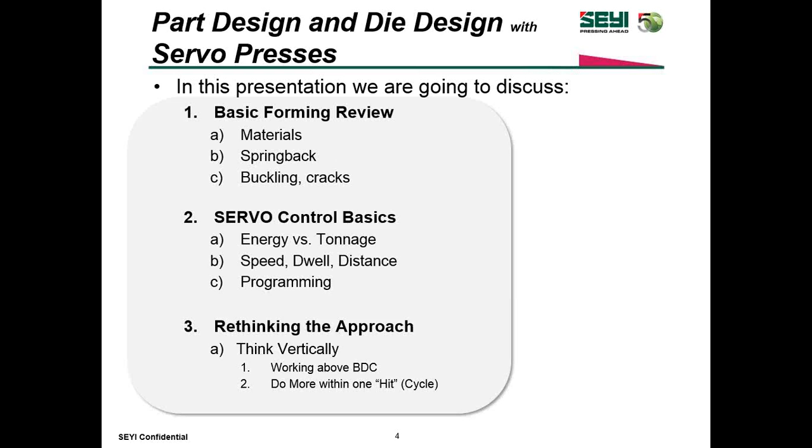As a part designer, you're always looking for cost-effective weight savings in the design process, mostly speaking from automotive experience, but it transfers to every industry. We're always looking at ways to design parts with less tolerance and closer fits. What I hear from customers, the tool and die makers, is that sometimes those part designs aren't very realistic. That falls back to the designer to foresee how gaps work, understand the material better, how it's going to form, stretch, and shape, trying to work with the part designer to come to a happy medium.

The third thing we should look at is that nowadays, with the servo press, the conventional way of thinking was that you design a part, design a die, and that determines what kind of press you buy or need and its specifications. Now with the servo press, it's turned everything around.

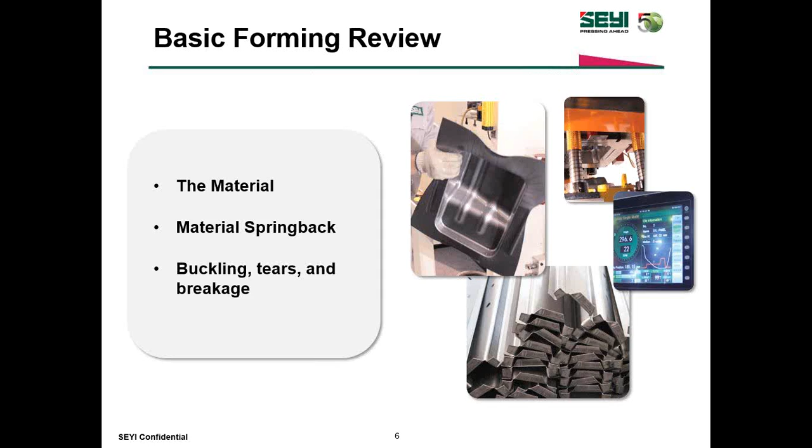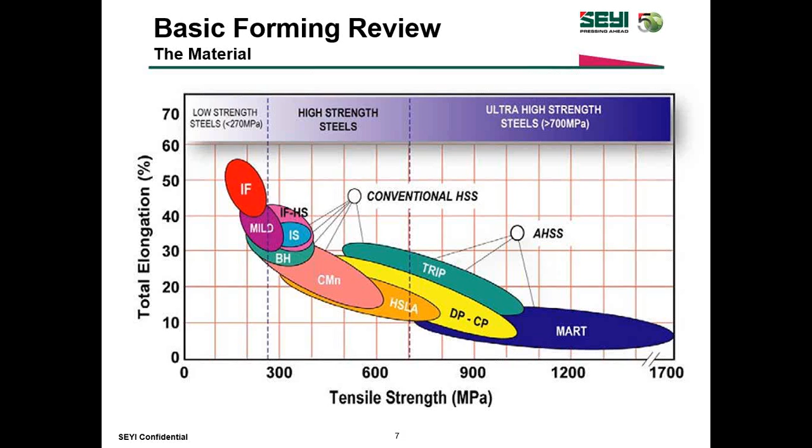Let's start off with some basic forming review, going through this quickly. Focusing on the automotive industry, we're certainly starting to see high-strength steel pretty much prevalent everywhere. We're even starting to get into higher strength steel, measured in megapascals, that are off the charts, getting into transformation induced plasticity and martensite, where these materials, especially with trip steel, actually harden as they're being formed and become a very complicated beast to grab hold of. What we're starting to see now is customers falling into these ranges of strength, yield, and tensile strength, getting into the 500 megapascal range.

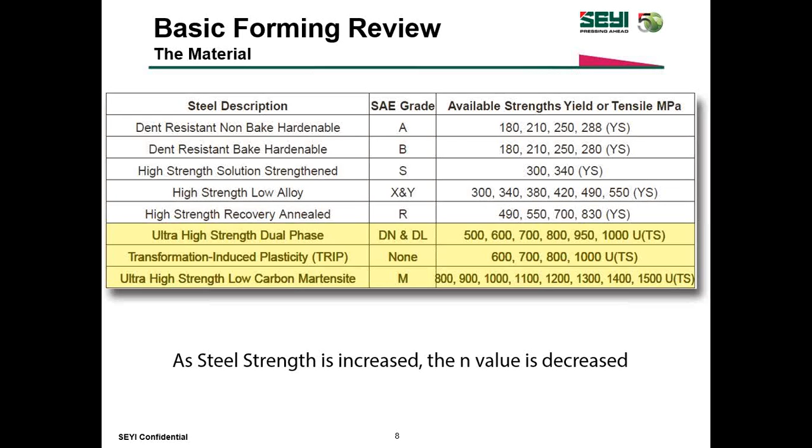As the steel strength is increased, the actual n-value, or work hardening exponent, and stretchability is decreased. With that comes the recognition from the manufacturing engineer that these high-strength steels have different forming characteristics, so they need to plan for the correct material with the correct part. What we really get down to is that we start introducing a lot of residual stresses and elastic recovery, and as you're working with these materials, they just want to bounce back - what we call springback.

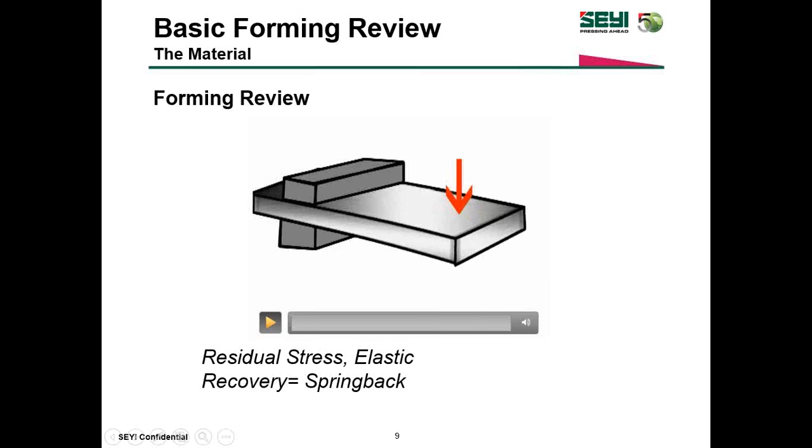This example is some testing done by SEYI in partnership with Taiwan University. They were testing using a flange die, running it through a typical mechanical press, and showing that as you jump up in steel strength, you get more edge curl and springback, and how to control that.

And of course, as we are talking about high-strength steels, you get that work hardening effect, and you ultimately end up breaking the material. So what we really want to try and do is try to form as much of the part as possible to its full depth in the first forming operation.

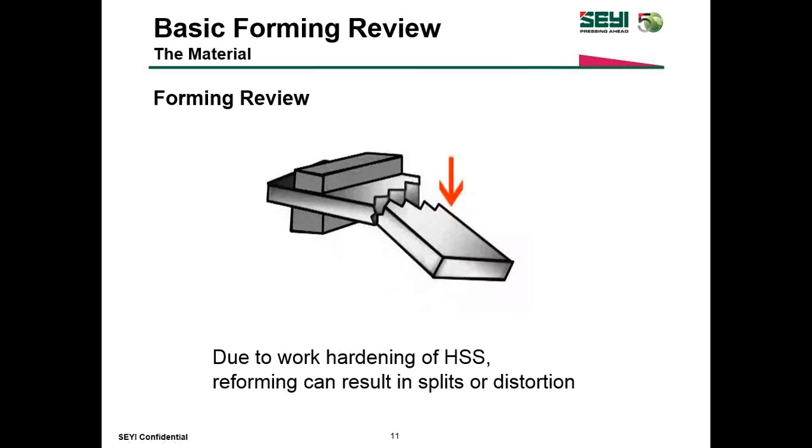So that it's not allowed to harden and break on the next strike. In the past, tool and die designers and part designers have come up with different ways of controlling the flow, or restriking to get rid of the spring back, and designing dies that way, or putting in binders. And of course, cushions and pads are very popular to try to control that material flow. And trying to form with a high-strength steel, maybe opening up the clearances a little bit so that it allows that material to flow a little bit better.

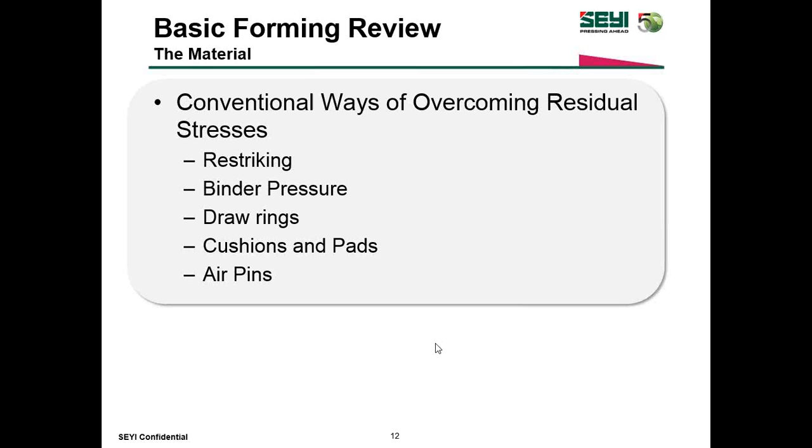And then here comes the servo press, and it comes along and kind of changes everything, because now we have control over the energy throughout the stroke, and running with maybe a higher torque motor, we can control the speed and control the distance, and by doing that we can have a lot more control over that material flow. The one thing I want to point out here, if it's not already known, is...

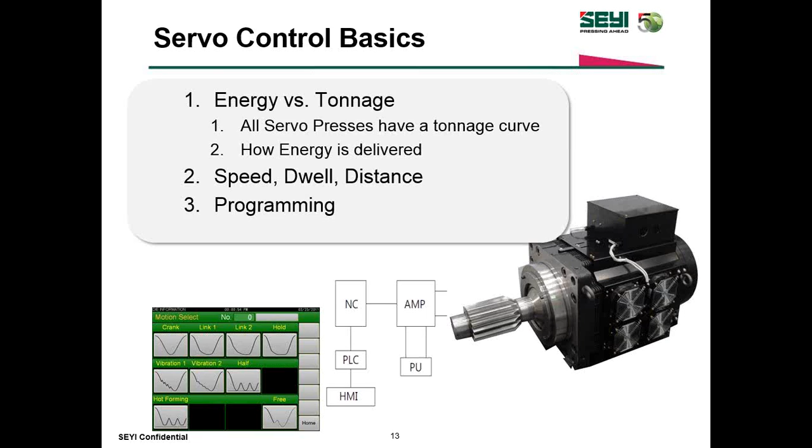...that no matter who it is, servo presses still have a tonnage curve and they still have a tonnage rating point. But of course, the big difference is that you have energy - you have constant energy throughout that stroke. So even, and especially when you're working at slower speeds, that allows us to have control over the forming operation.

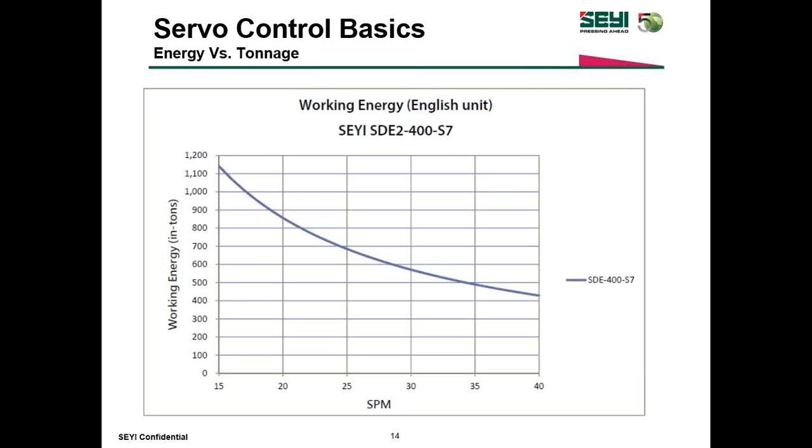Now, real quick, I believe every servo manufacturer is going to allow you to control that slide position, your dwell time, and of course the speed at which you're forming. And you should have the capability to program set points. Seyi goes up to 20. Other manufacturers may have different quantities, and that is the control you have over one cycle of the press.

So over one press cycle, you're controlling 20 points, and those points, when you look at it in a die design, transfer over pretty transparently as to what's happening at a point in the die and what needs to be transferred over to a program profile.

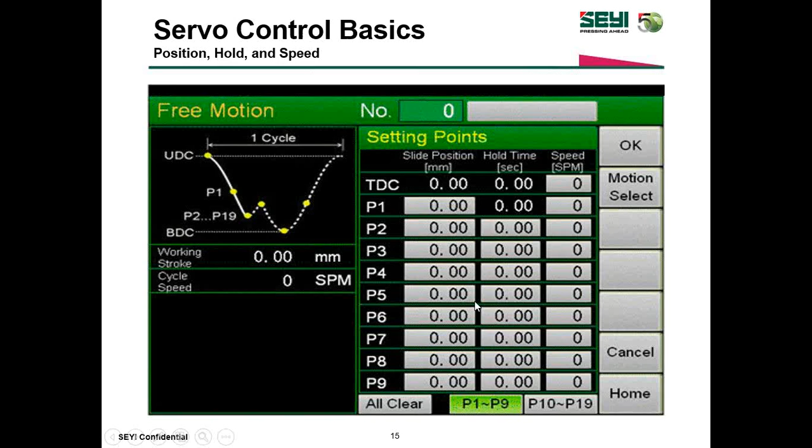So in this particular example, I wanted to give you an idea of how a program, how a profile is programmed. And this example is actually a demonstration that Nader had performed in Sweden at his shop this past January.

And what it demonstrates is one of the motion profiles built into a Seyi press called vibration mode, which allows you to step down and come back up, down and up, down and up, down and up as you approach bottom dead center.

And by doing this, we're controlling this male portion of this gingerbread man, to make this beveled edge, and to be able to do it with high precision. I'm going to try to play a video for you here to see it in action, and then discuss what is taking place in the profile.

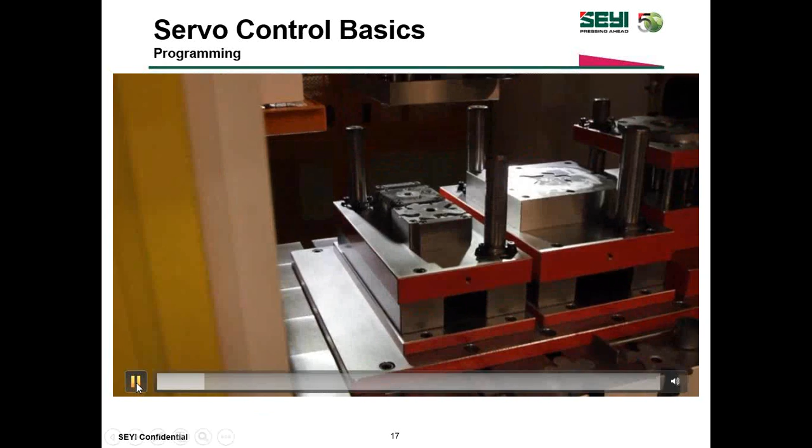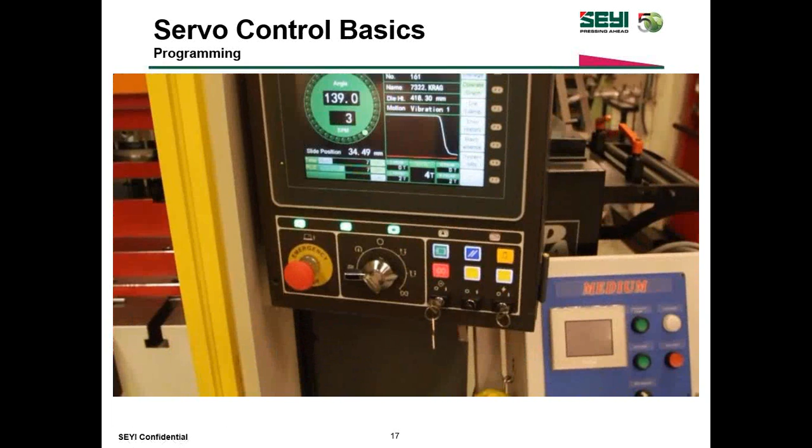So what we're showing you right here is the actual signature as the part is being made. Oops, what happened here? Okay, let's go up one. Go over a little bit.

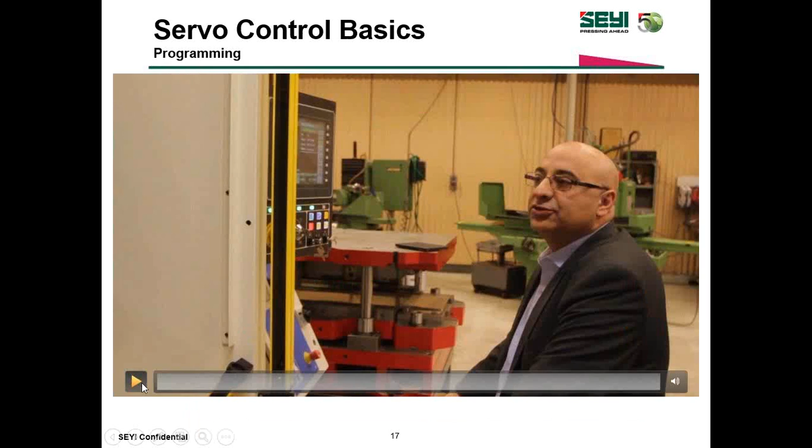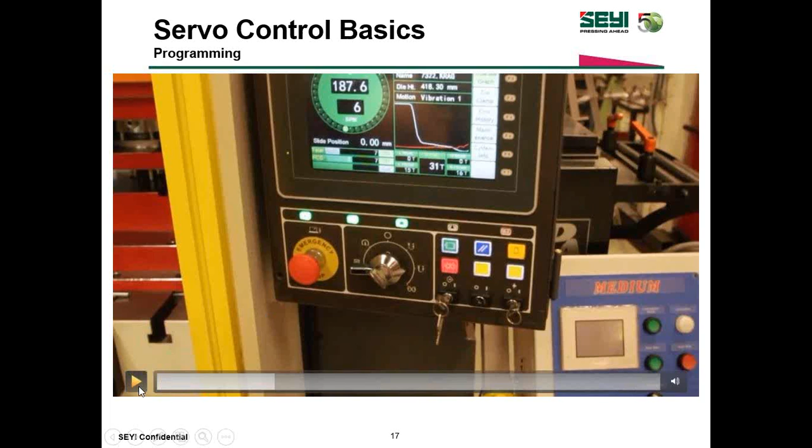So what we actually have here is your tonnage signature. We're getting closer to forming, and then you start seeing your tonnage go up. And barely noticeable is actually this step down as it's going through and forming the part. Let me come right back up to top dead center.

What we end up here then is what we're testing out. So, you know, there's no heat coming off of this part - he can rub his finger around the inside of that without any burrs or cutting the finger, and then we have that pretty tight radius around the opening.

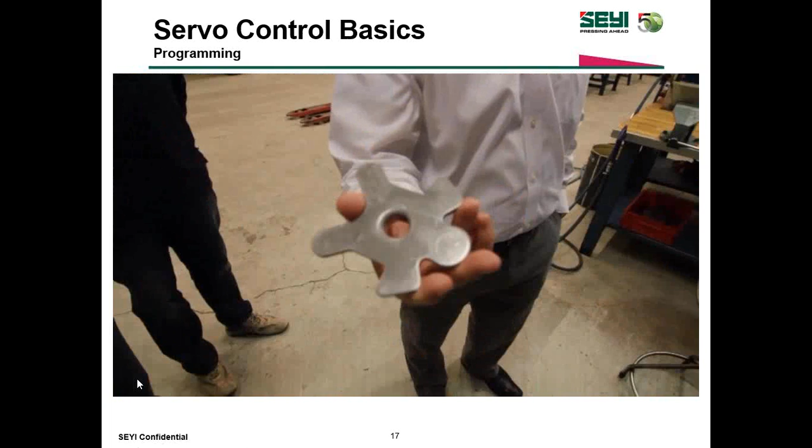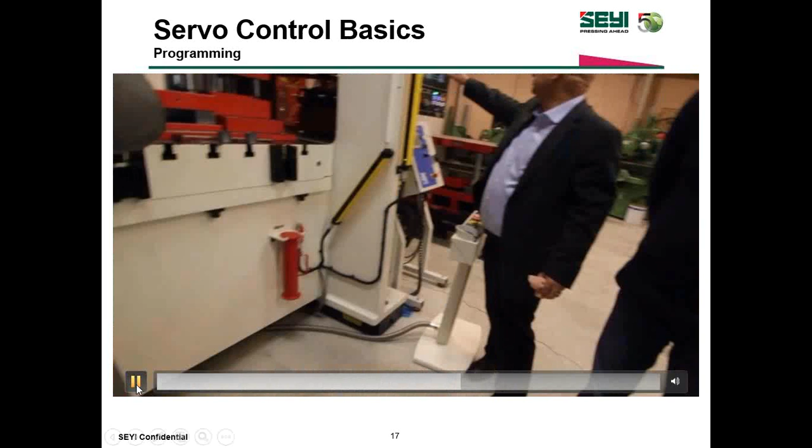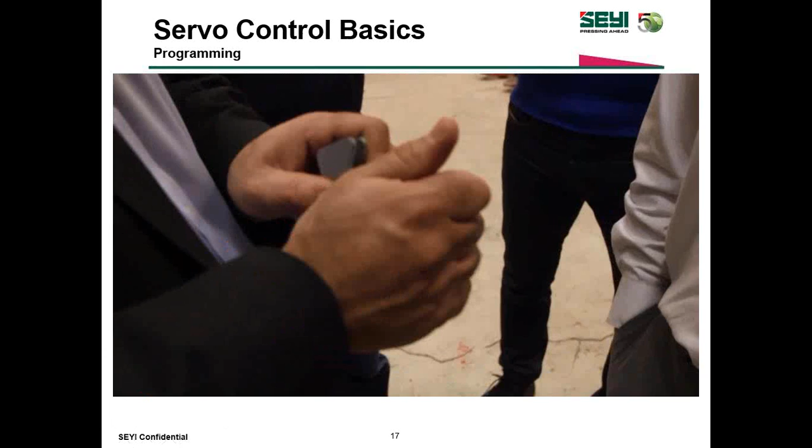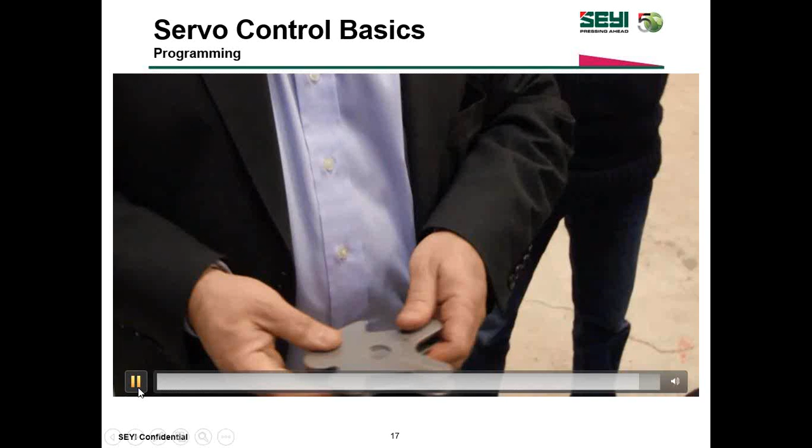Here we're describing where there's no burring or tearing. By doing that step motion, we're allowing the material to flow as it goes through, and slowly bring it together without having any cracks or distortions. And the resulting part, going onto the extruded end, fits together seamlessly, coming right out of the die with no extra steps needed.

So what we're actually doing here is, when we're setting our points for this particular die, you start off with your top dead center at 250 millimeters. We're going to come down at a pretty swift pace, down to 45 millimeters, and we're going to start our first step, P1 to P2, and slow it down a bit.

From this point on, instead of having to enter multiple parameters each time to get your step, this particular feature of this mode allows you to say, okay, when I get done with P2, I'm going to come back over here. I need to go up another 0.3 millimeters, then do it pretty slowly, and go down another 0.8, and continue doing that as many times as I want. In this case, 35 times. So in these 35 steps, you get the resulting part.

Nader, is there anything that you would want to add to the explanation of this particular part design? We're trying to demonstrate the vibration mode, but what other information could be gleaned from this example?

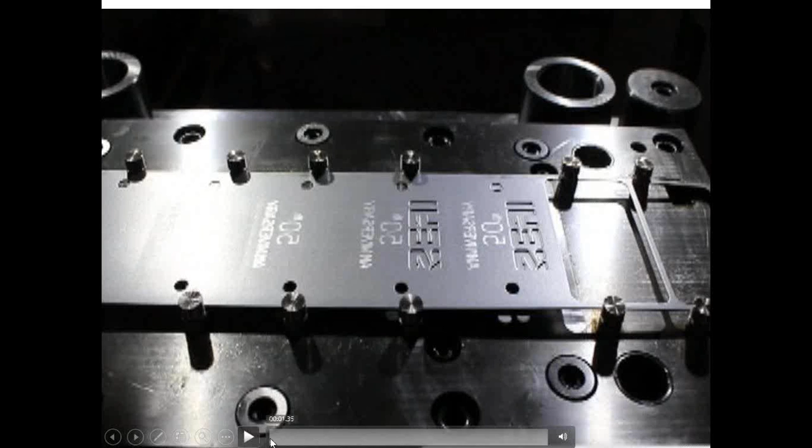It really just wanted to demonstrate how easy this is to move into a pendulum mode. We're just selecting the profile, and hopefully this won't go back again. I apologize, the run button disappears and then I don't have an opportunity to stop it. Probably could change that. So we're just selecting the half or pendulum motion from the motion select.

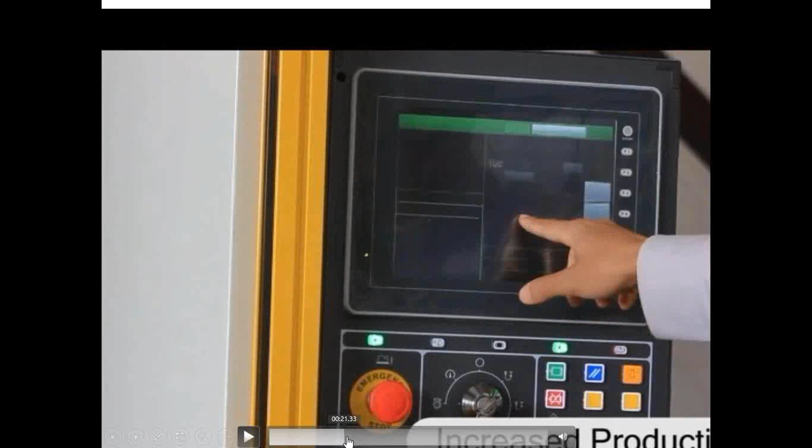All we really have to do in our first set point is adjust the top dead center. So instead of doing it at 250 millimeters and going a full revolution, we're bringing it down to 70, and we're going to keep the speed at 30 SPM, which is the rated SPM for the press. Then you hit OK. That's all you really need for your parameters.

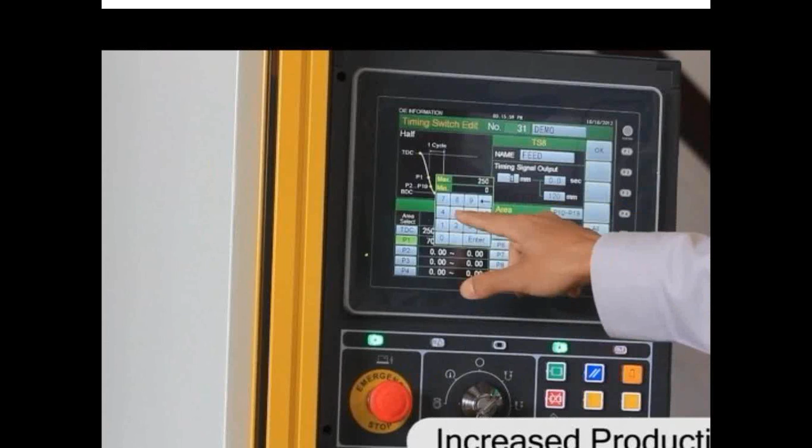Because we are running a coil feeder on this, built into the controller are your timing switches, so you need to adjust those as well, to make them move a little bit faster. Your timing signal needs to be adjusted so that you're feeding quicker and feeding your lengths. You can see you're either feeding by number of seconds or by the length of the coil that you need to feed through.

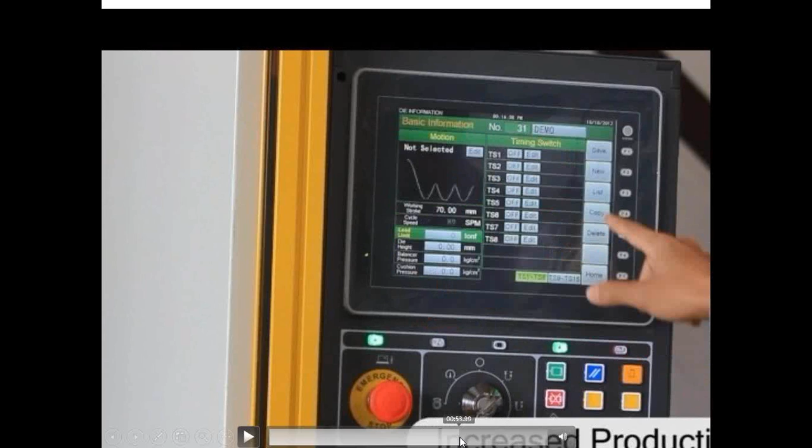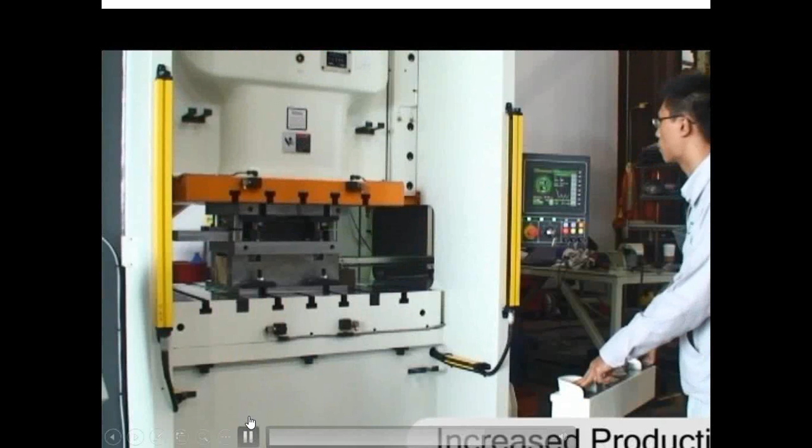You set your position, you get everything set up, and you're ready to go. And so now suddenly in the pendulum motion, you've actually increased the speed to 76 SPM, making the same parts.

But I think this is the feature that everybody seems to be very familiar with, and it's pretty easy to do, maybe one of you already have a die that you've already built. So you look at those few examples, and from our standpoint, when you're looking at servo press and thinking about how you could possibly employ this technology, you start thinking more vertically, and maybe that's why a lot of the transfer manufacturers are becoming very popular.

Because you see it where parts are being designed where you can do more in one revolution. You could start higher up in the stroke, having that energy to be able to come down on it and perform more operations before you actually reach a full cycle.

So what does that do? It's allowing you to, maybe you've got progressive dies and you look at them and say, how can I take this progressive die and reduce the number of stages? It could be a current die that you already make.

The one key thing to keep in mind is that, for the most part, you should be able to run any die that's built for mechanical, a regular mechanical press, on a servo press, but it's not necessarily the same way around. So when you get into servo, you're in it, because you probably won't be able to back out of it without having to retool.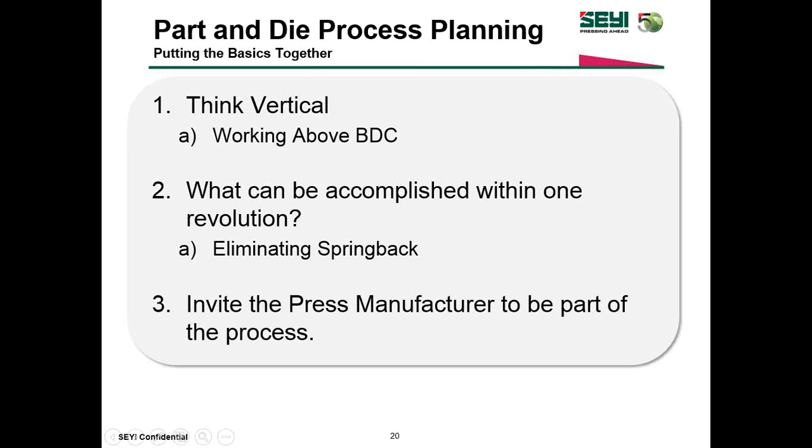So when we look at thinking vertical, this next video is exactly what we're talking about here. Reducing, in this scenario, the blank's already made, but we're going to basically take 4 stages down to 1.

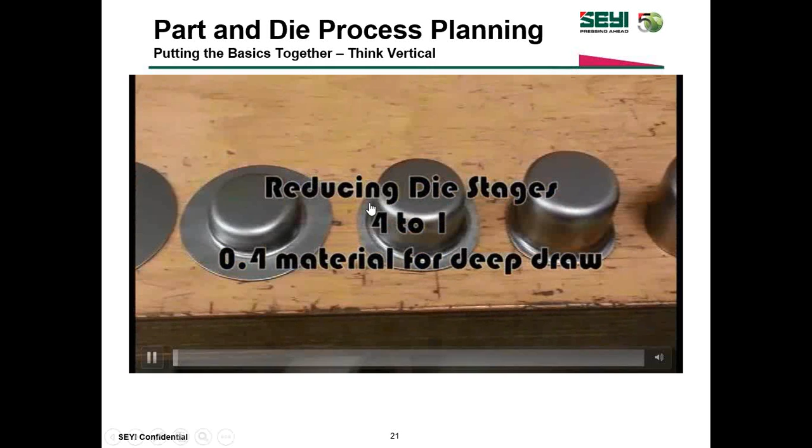This is another example. This is a typical 0.4 deep draw material. By the way, this is Nader, if I didn't already mention that, in his shop in Sweden.

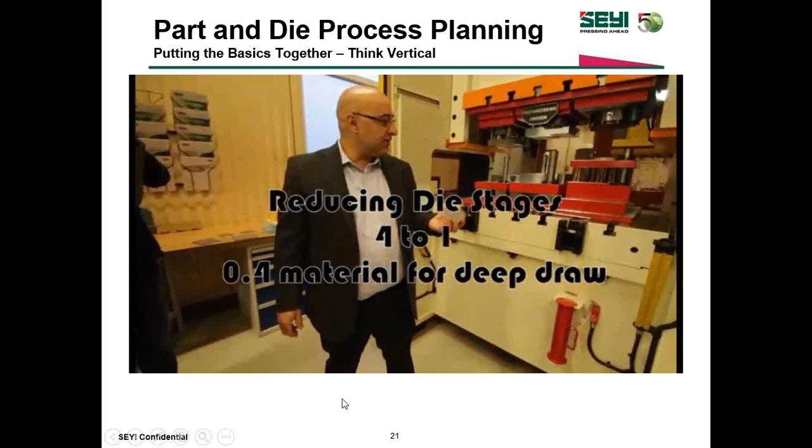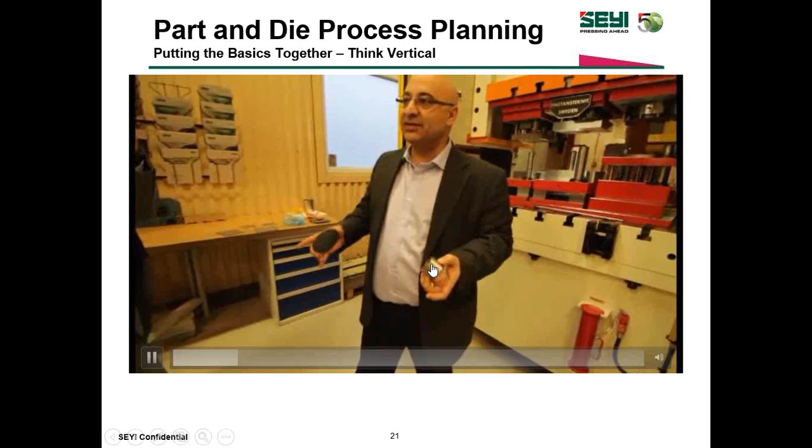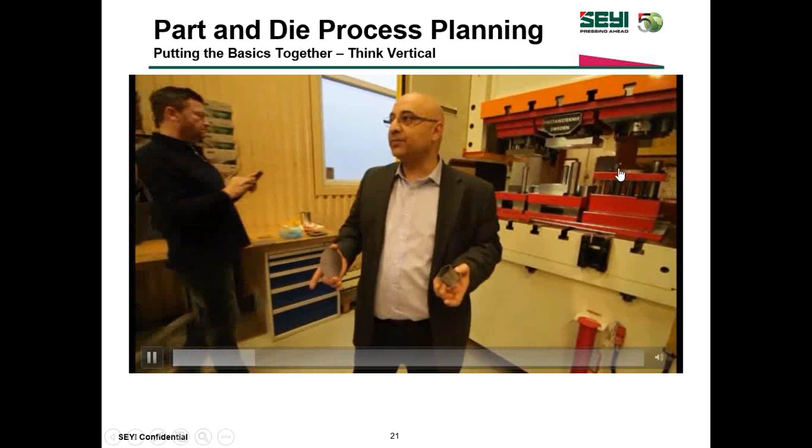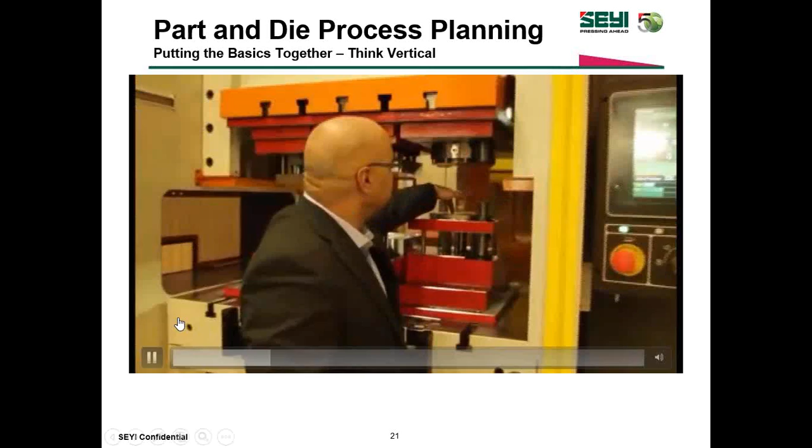So what's being explained right now is taking those stages down to 1, and then even in this particular example, I think it's important to know where the die is actually set up on the press, it would be impressive. It's impressive to see that we've got this fully loaded on the left side of the press, and that's just showing you some of the rigidity that the servo press should have in maintaining the precision, tolerance, in the off-center load, deflection, and such.

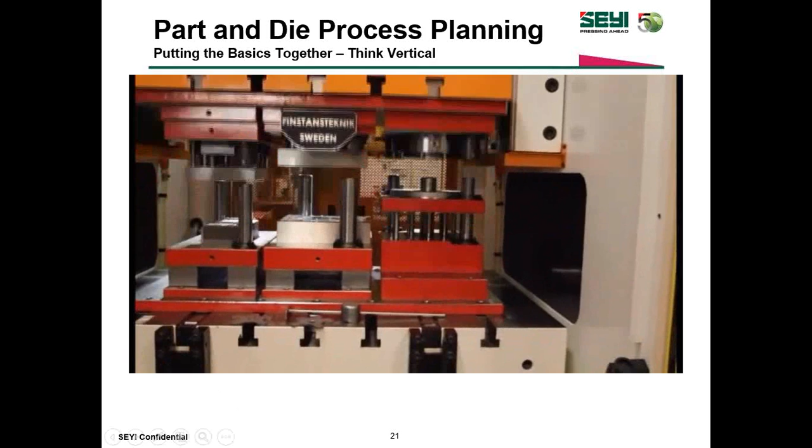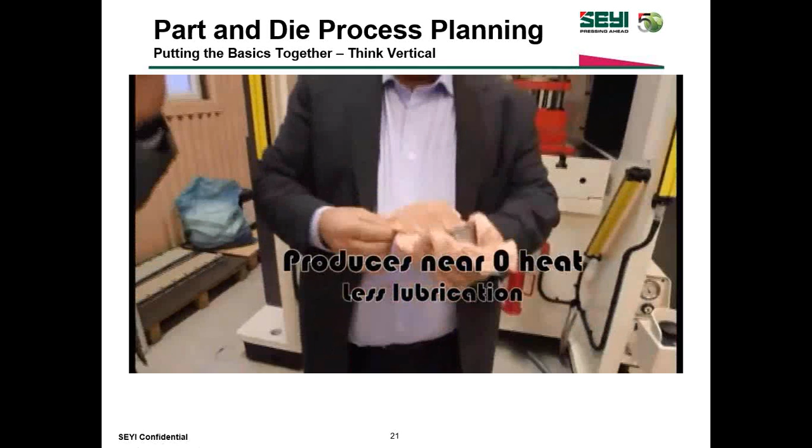So I think this is a pretty simple way of looking at how to optimize the tooling using the servo press. And then a lot of those, you get into the part design and die design process, and thinking about the materials, and then thinking about lubricants and how they impact the formability.

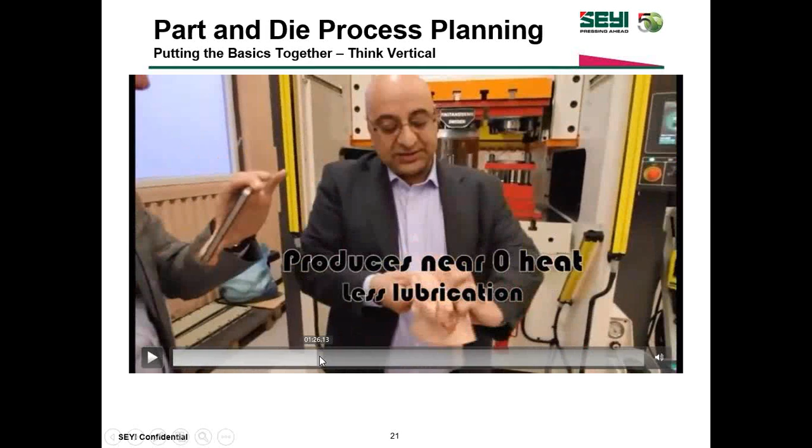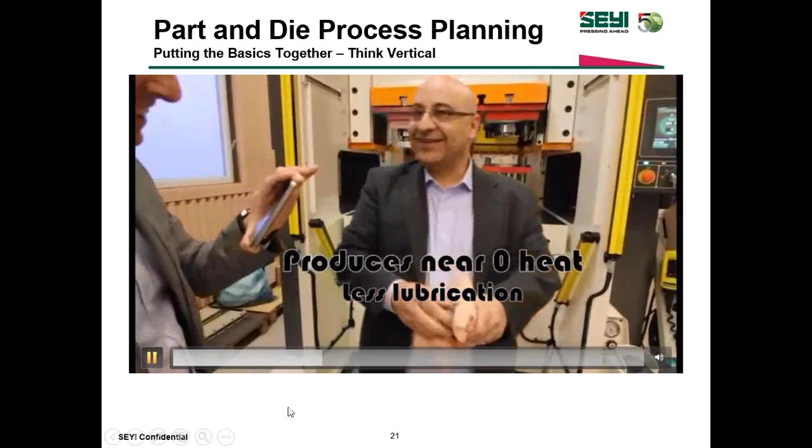You're starting to notice, okay, there really was less lubrication used. In some instances, I know I have customers who said they don't have to use lubrication anymore to run the part. Just by being able to slow the press down and control it more, the material is able to flow, and because of that, we get less gas coming off of the oil, and the part itself is not nearly as hot as it would be if you were doing this in a hydraulic press.

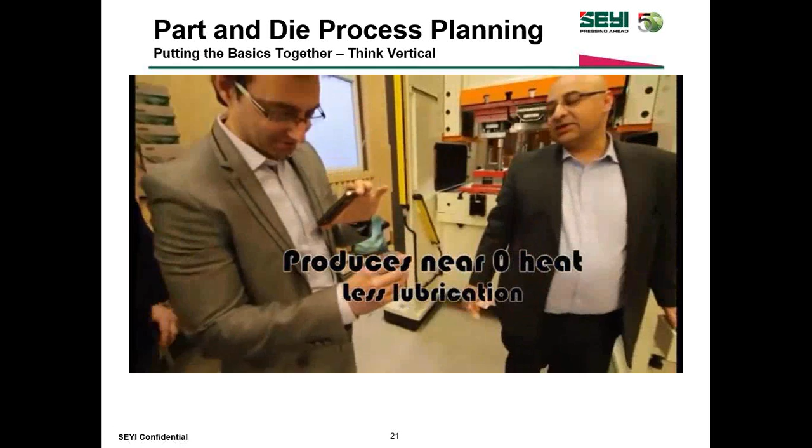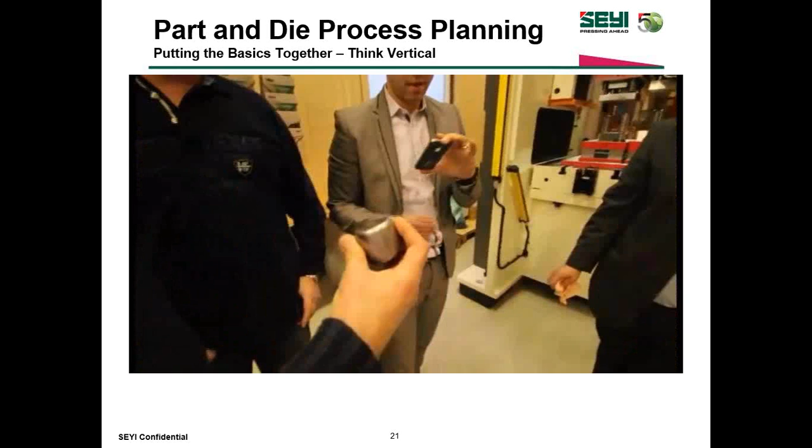Now, is there anything that you would like to add to the description of this die and this particular example, and what was being accomplished for this part?

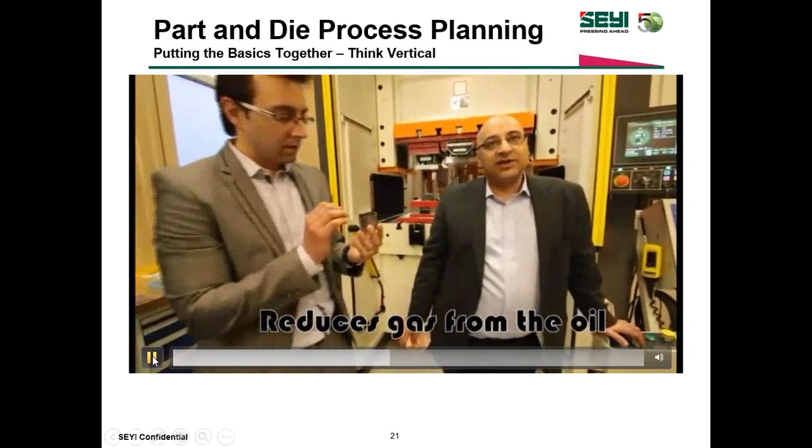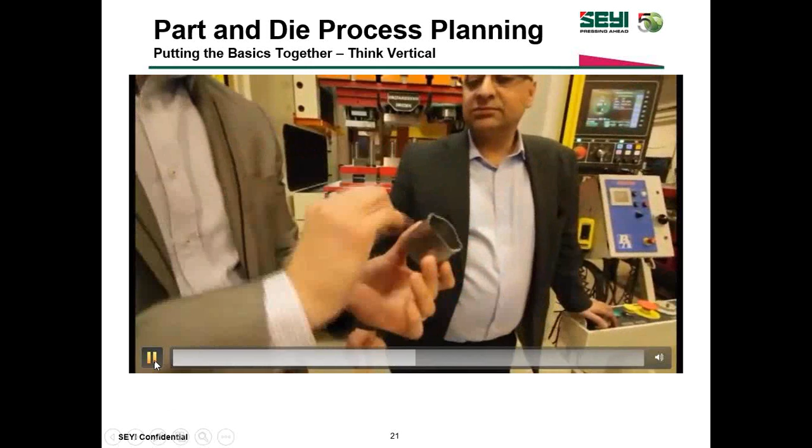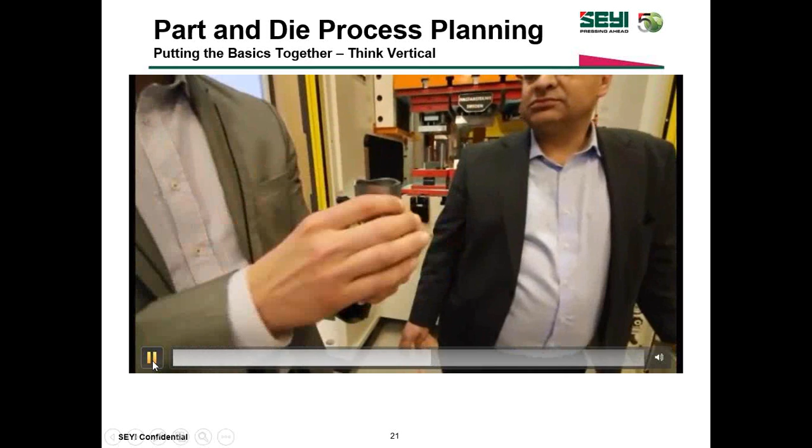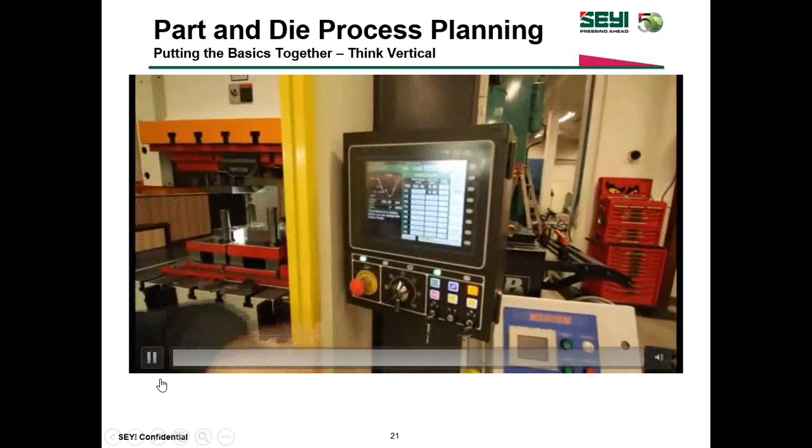It's actually we get very flat on the side. Normally, if you do this you need a hydraulic press for this kind of deep drawing, and the temperature of the part coming out from the tool is something like 80 degrees. But here it's not more than 30 degrees. That means we have the lubrication, and what we do is go up and down a little, and then we apply the lubrication with very little lubrication needed. So we do it in one step.

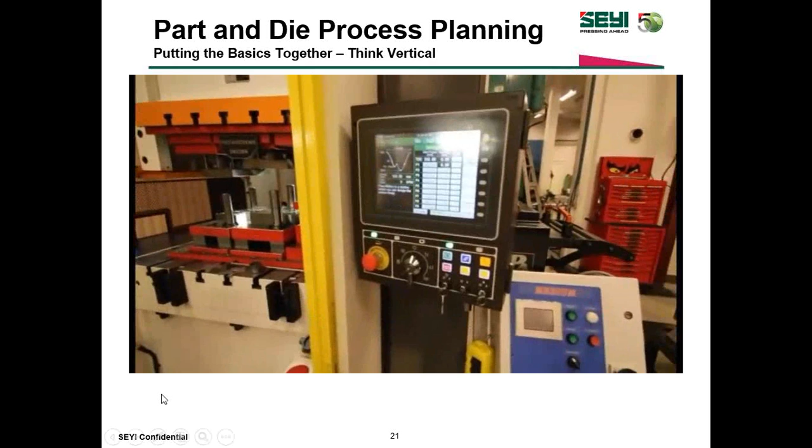Nader, you designed the previous die, right? It was a 4-stage progressive die, and then you came back and redesigned it as just one die set with the final draw done basically in one stage. Is that how you approached this?

Yes, but what you can do when you set up the tool and test it for deep drawing, in this machine you're able to drive the machine with manual hand control and see what's actually happening when you make your deep draw. And you're able to make the program, in this case free programming, to produce the part in the best condition.

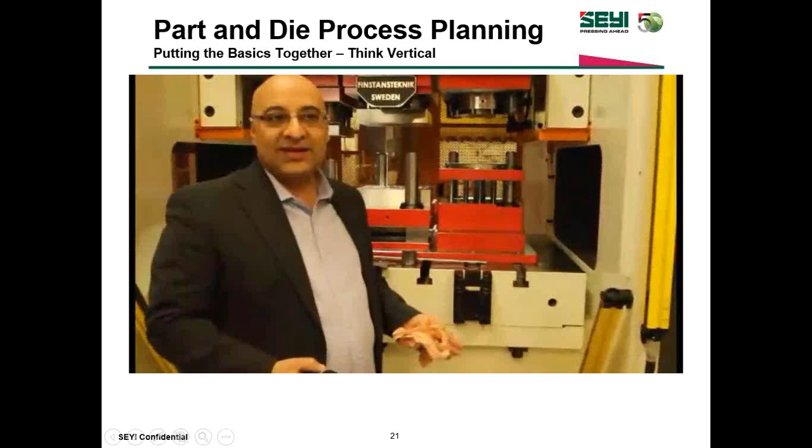Another example, which Seyi has probably used ad nauseum. This was a part we had when we debuted our servo presses back at the FabTech Chicago show in 2011. It's another example of going vertical here and forming. This is about a 4-inch draw. We took this stainless steel oil pan in our testing and ran it in a conventional, I think 600-ton mechanical press.

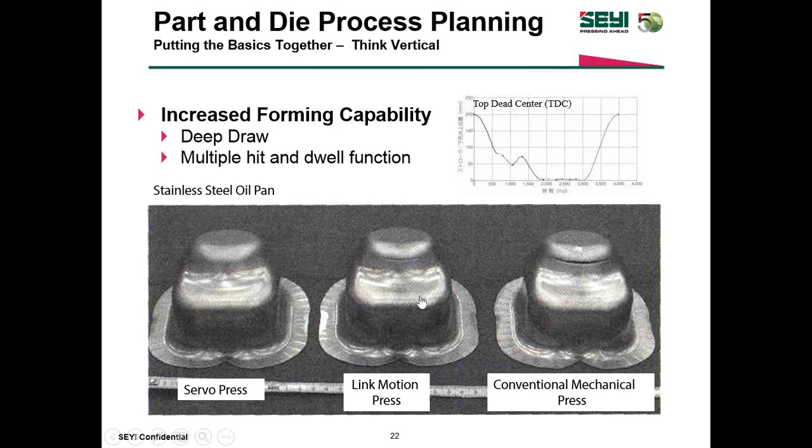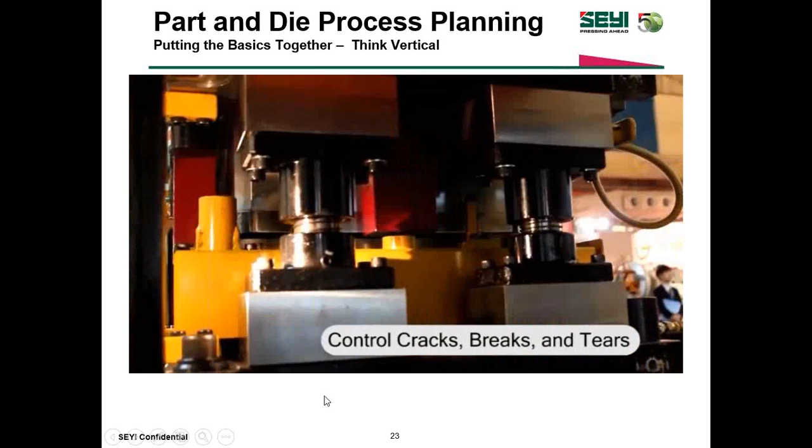Then we tried it in link motion, and then optimized it for the servo press. So it's something you could do maybe in a mechanical or link motion press, but is it going to be effective? Probably not without additional tooling or a lot more control. In this example, we're using a hydraulic cushion to bind the sides and control that, but for the most part, within one stroke, one cycle of the press, we're going to form this entire shape.

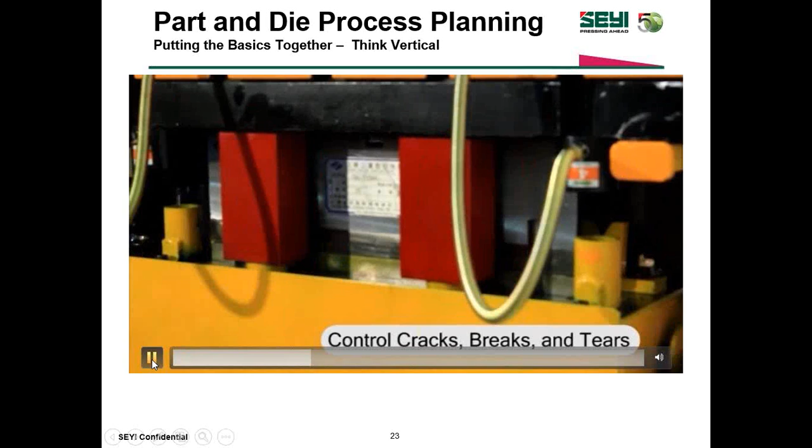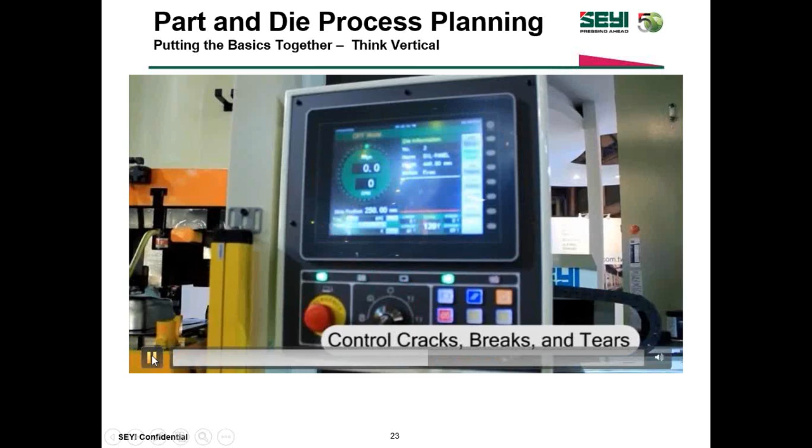So again, we see the tonnage signature, and then we have the actual real-time profile of the part being made based upon the program. Just selecting from the menu, holding 200 jobs, selecting from that menu, and now we've got our set points for what's actually happening with this part.

We're dwelling for about half a second, but it's really only taking 4 steps to create this, not necessarily complicated, but a pretty good deep draw. So there's not a lot of effort going into transferring what needs to happen with the die over to the program. It comes out looking beautiful.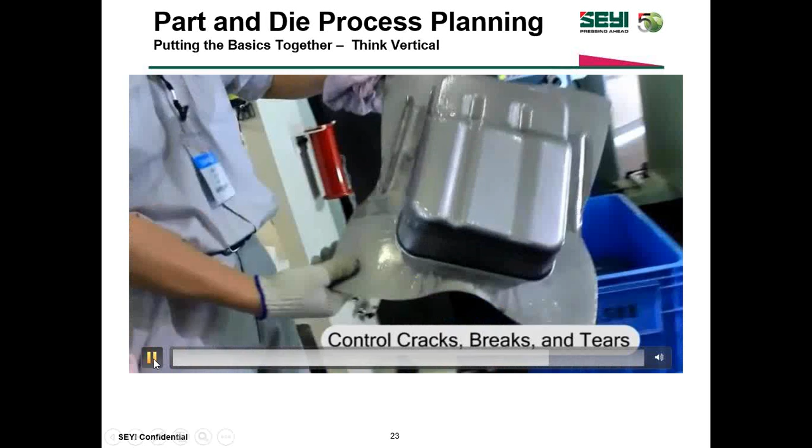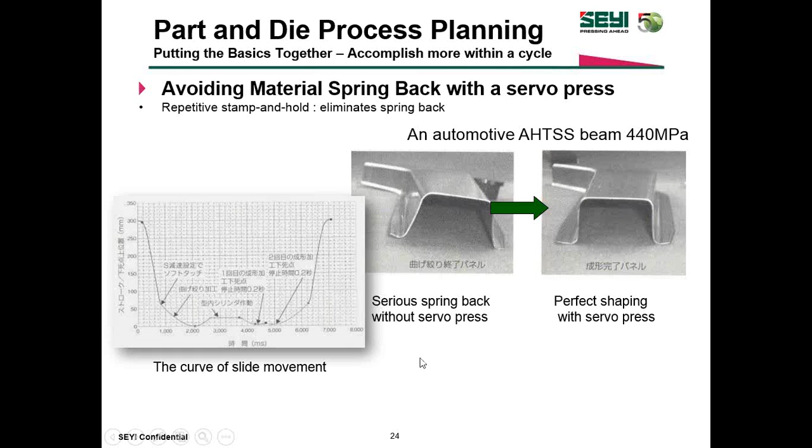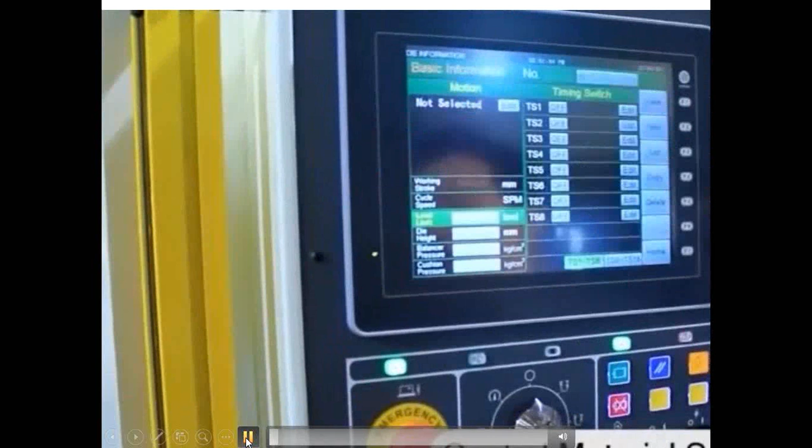Finally, getting back to an earlier slide dealing with advanced high tensile strength steel. One of the things I read is that when dealing with these hat shape or structural components, using flange dies, you try to overcome spring back by having some allowance to overbend inside the die and then doing a restrike. What we're trying to do here is eliminate having to do that, and control the spring back as it's being formed.

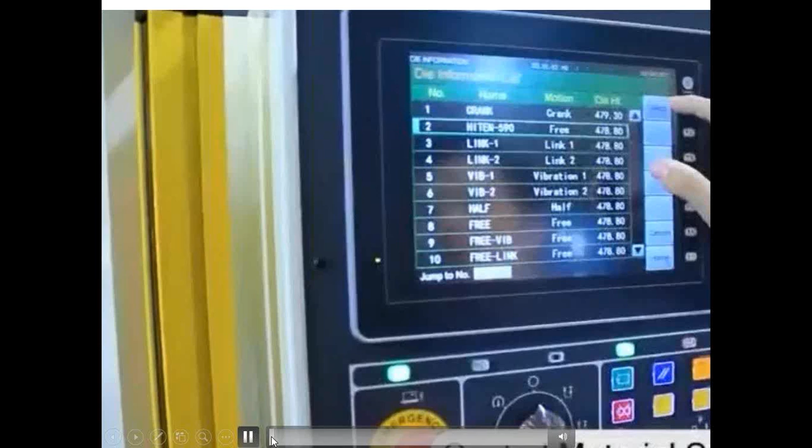So looking at this profile, we're still starting at 250 millimeters. We go down rather quickly to 80 millimeters. This is a 10-step process, and really where the action happens is when we get down to 10 millimeters above bottom dead center, then we go up a millimeter. That allows the material, and this may not be the technical term, to kind of relax for a second until we then bring it down to bottom dead center. That's where you're really taking out the spring back.

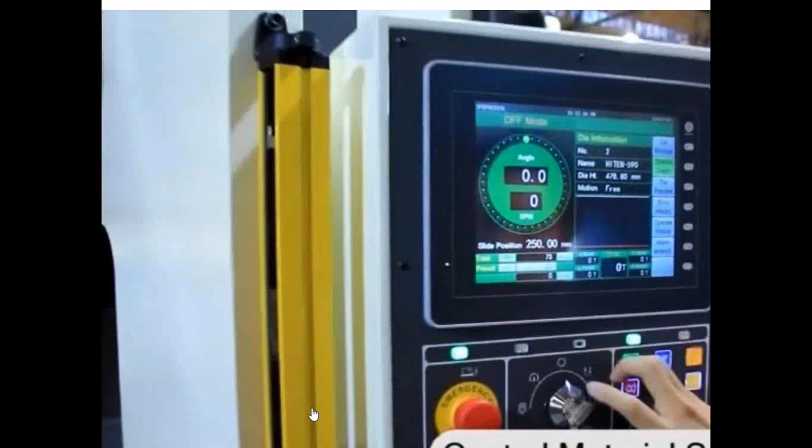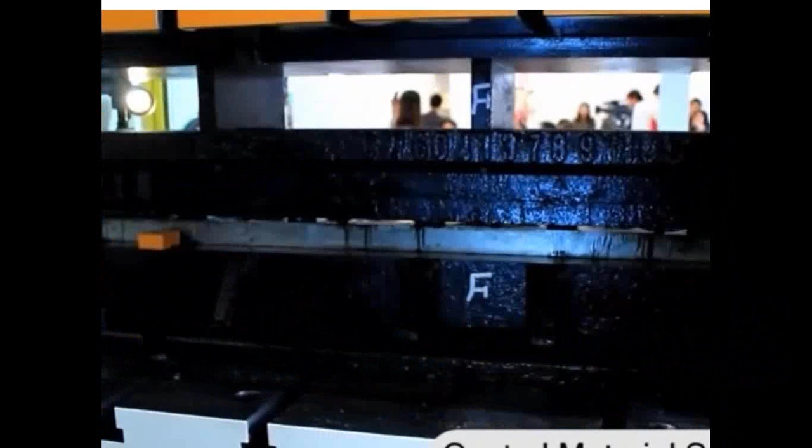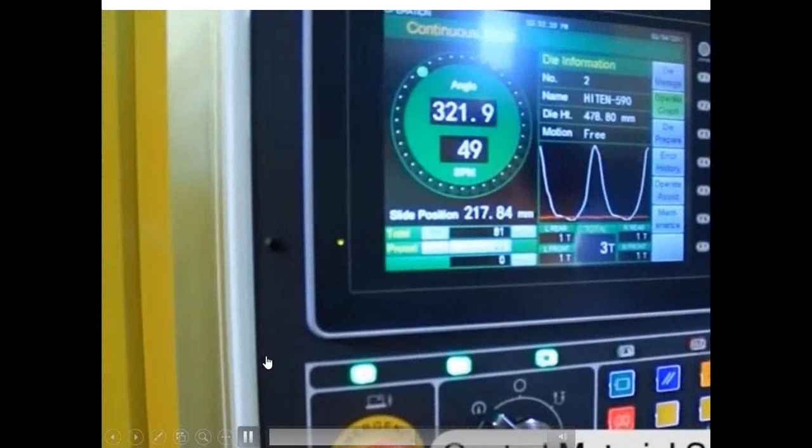So that's the press action without the piece in it. You do have these springs up here for supporting the material, and then your signature with no load.

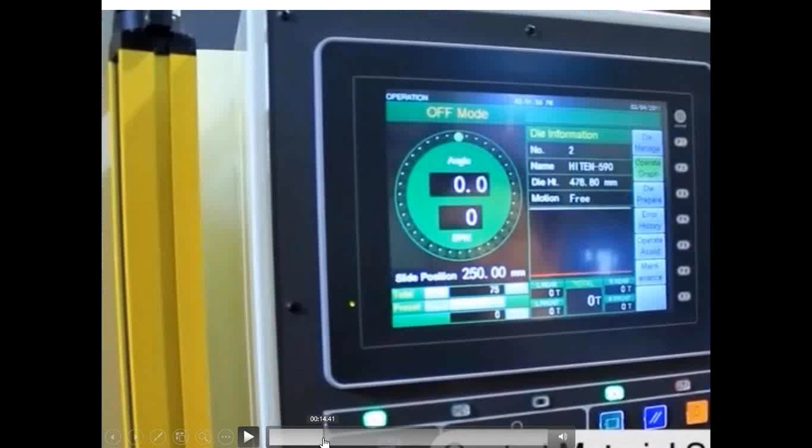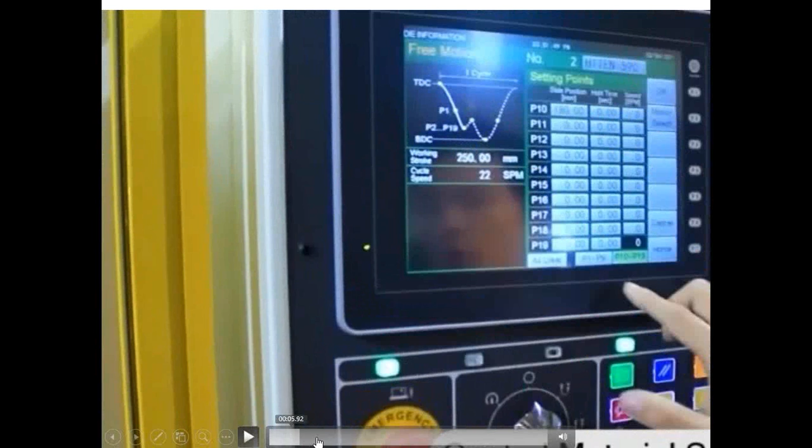By the way, this is a high strength 590, I believe. When we first got right up here, this high tensile strength is 590 MPa, so we're starting to get up into dual phase, and even though it's certainly not trip material, we're getting into that type of hardness.

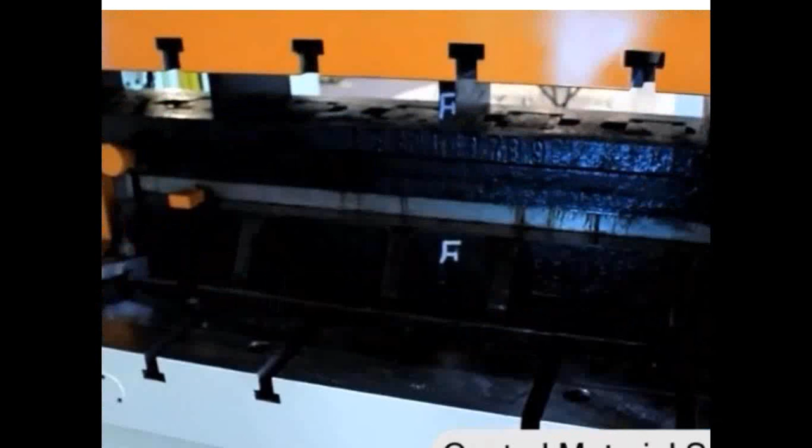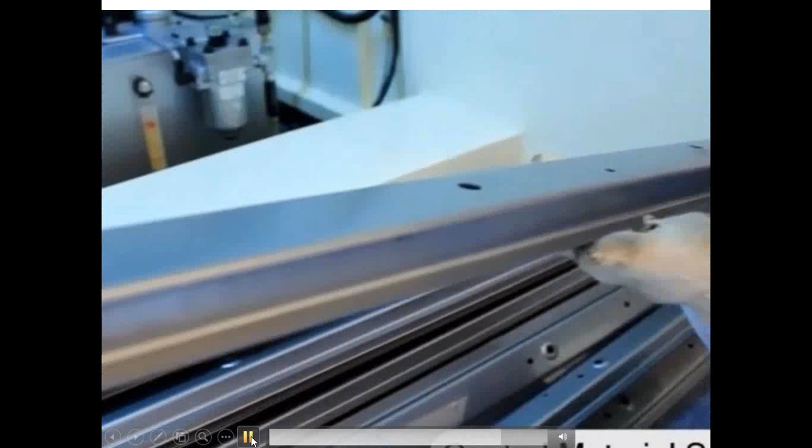So your final piece comes out with a perfect bend, and we're doing all of that within one cycle of the press.

Thinking vertically about how much you could do in one cycle, maybe removing the spring back out of the material. Again, reinforcing the invitation to the press manufacturer - from Seyi's standpoint, we have Nader, and two design engineers, a Japanese design engineer and a Taiwanese design engineer, who will look at and help evaluate a part, or even a current operation, and say how can this be optimized. There is some responsibility from the press manufacturer to help you get more educated in what to look for when optimizing for the servo press.

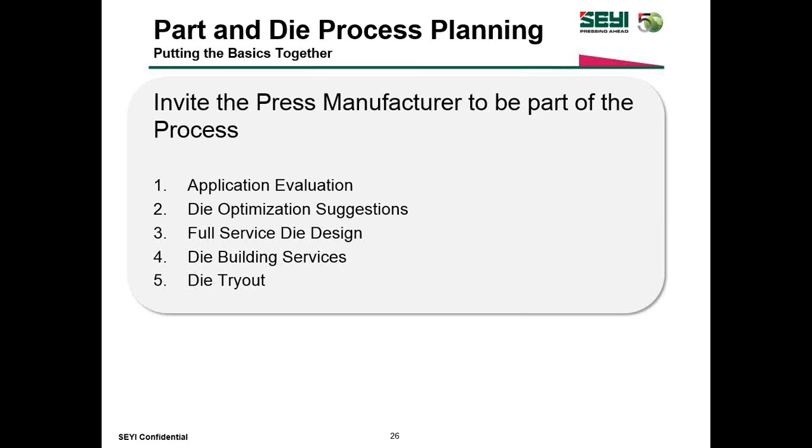Without owning one and having the opportunity to play around, or maybe the resources or time, you want to be able to look to some experts, and those experts may be with the manufacturer - at least it would be with Seyi, regardless if you're a customer or not. So that's a basic approach to the things to look for, coming from a part design and die design standpoint using the servo press.

At this time, we'll open the floor up to any questions. Certainly it's difficult to get into very detailed information in the time we have. If you have a question that goes beyond my ability, Nader is here as well, as a tool and die maker, to help answer those. So thank you very much.